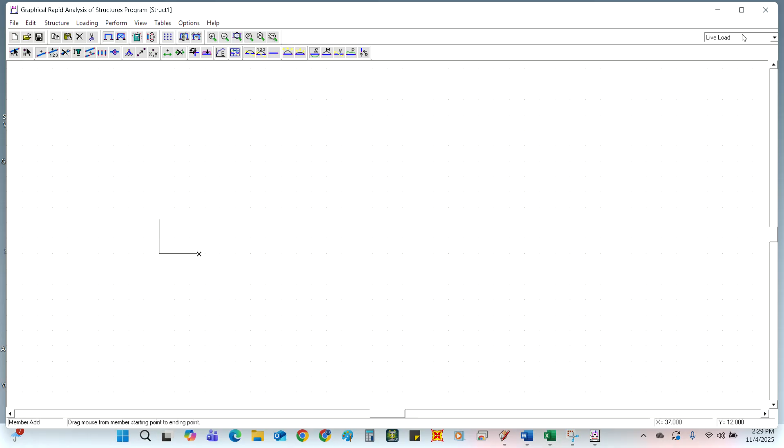Let's say, for example, a standard building. We will analyze a standard building from the bottom of footing to the second floor level is 5 meters. New.

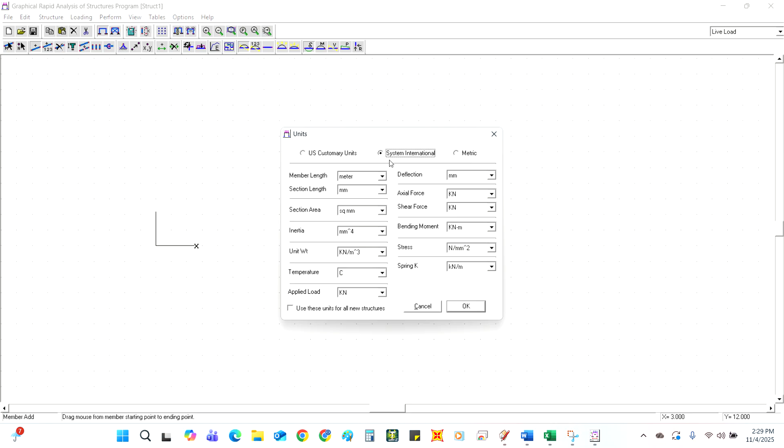Kunyari po, meron tayong two-story structure na from bottom of footing to the second floor level, 5 meters po. Bilang po tayo ng 5. 1, 2, 3, 4, 5.

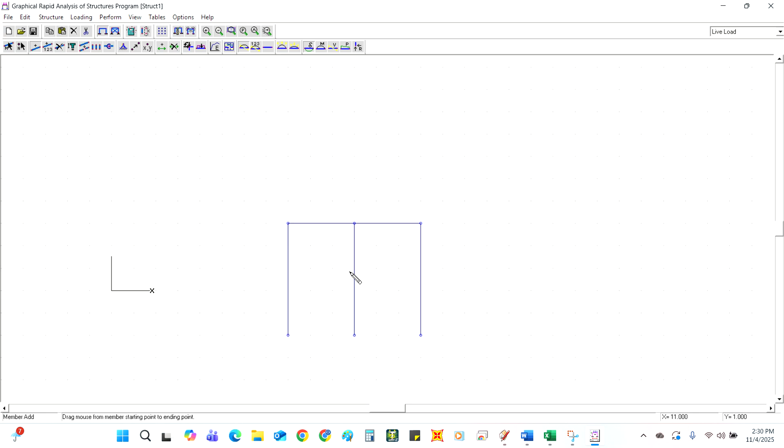Tapos ang span po from column to column, let's say for example 3 meters. 1, 2, 3. 1, 2, 3, 4, 5. So let's say for example from the second floor level to roof level is 3 meters. 1, 2, 3. Then we will assign supports po.

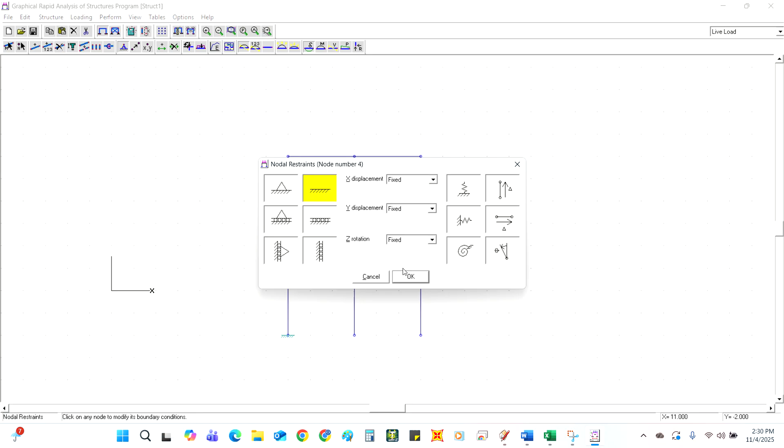This icon is for the support. Modify nodal restraints. We'll assign it as fix, fix, fix. And then the loadings for each floor. Let's say 20, 20. After this, we will put earthquake loads.

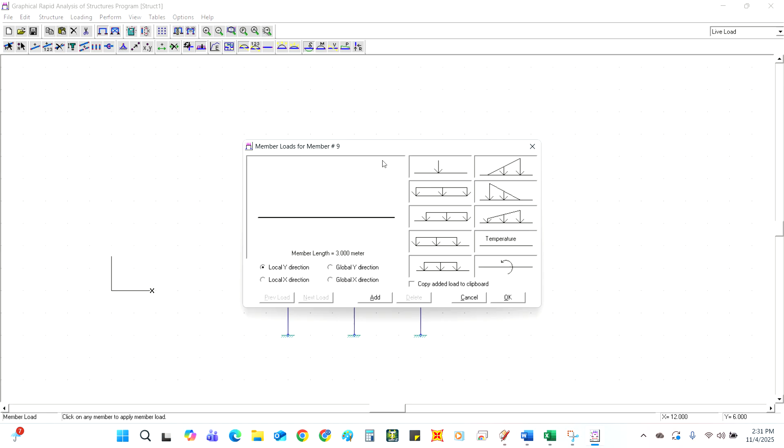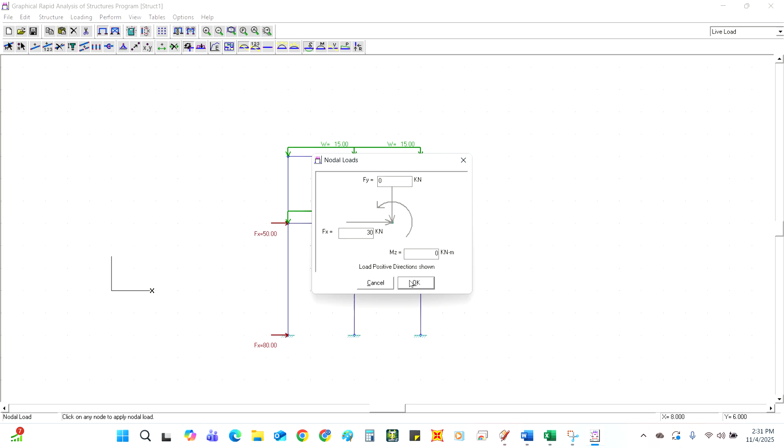Dito po, pag maglalagay po tayo ng nodal loads, ito po yung icon. Let's say 80, 50, 30. Yan. Pwede na po tayo mag-analyze. So, ito po yung pag-calculate, perform the analysis.

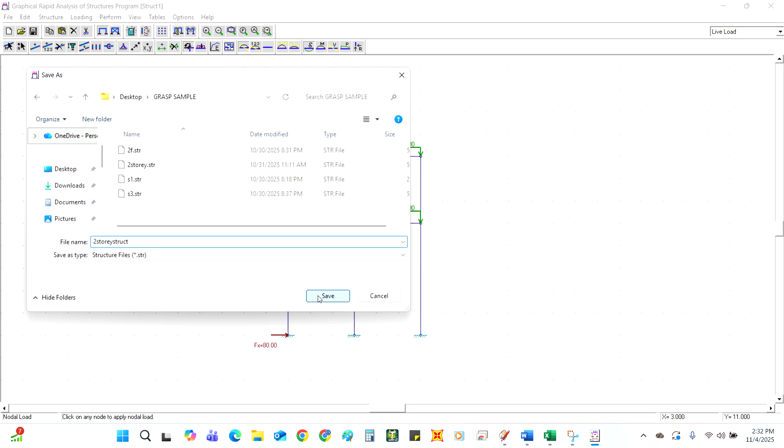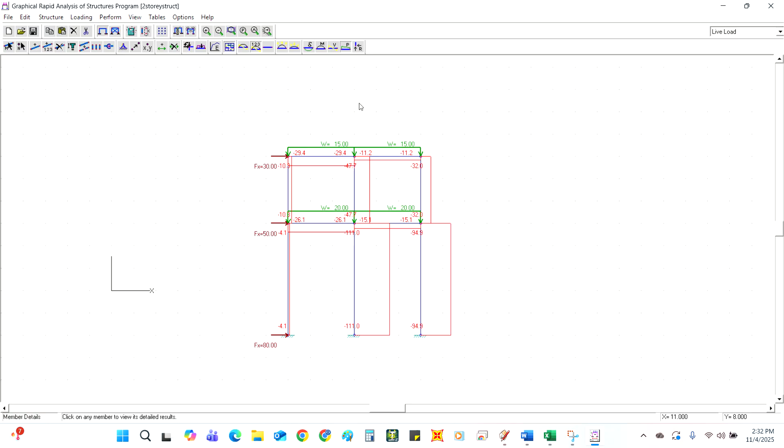Meron na din po tayong reactions, maximum axial loads. Pwede na din po nating ma-determine. For this case, 111 kilonewton po. Shear diagrams, moment diagrams, elongations.